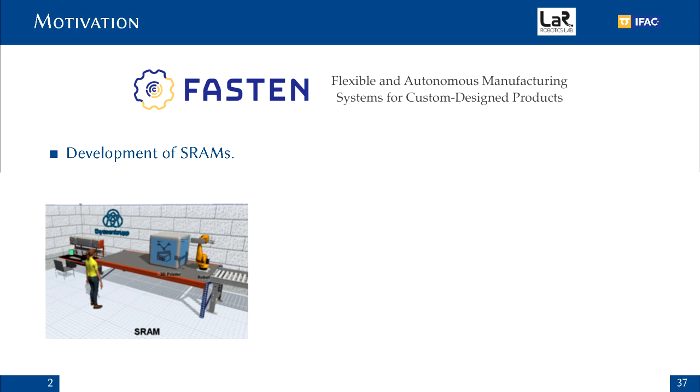This research is part of the development of Smart Robotic Additive Manufacturing Unit (SRAM), supported by FASTEN. This system is capable of recognizing and picking up parts without the need for human interaction.

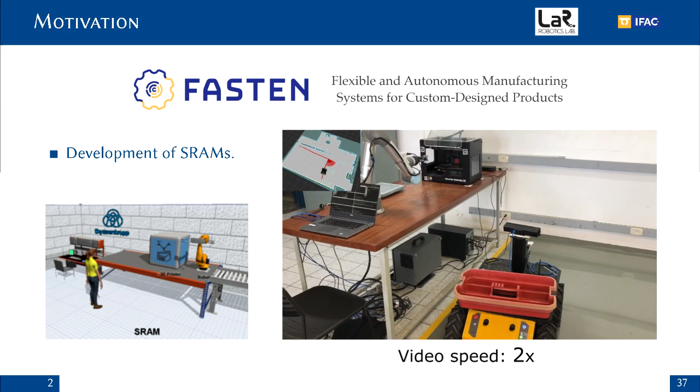As you can see in this video, an AGV robot moves autonomously to a position close to the manufacturing unit to collect a 3D printed part. A robot manipulator picks up the part on the print pad and moves it to the AGV robot. After that, the AGV robot moves back to the initial position.

This additive manufacturing unit must be safe enough for avoiding collisions with objects in the environment during the pick-and-place activities. As a solution to this, we proposed an improved path planning technique based on the artificial potential field algorithm.

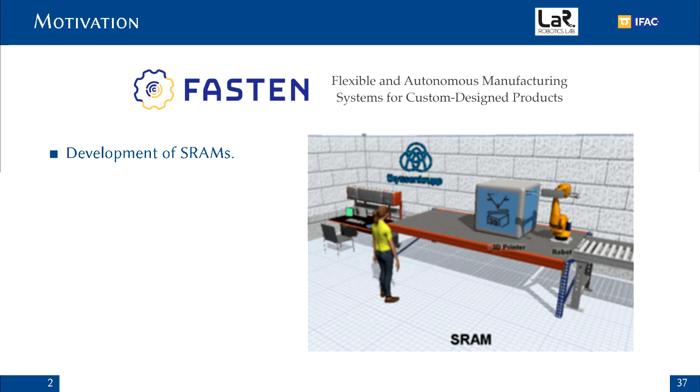This additive manufacturing unit is responsible for recognizing an object, estimating its pose, grasping it using a vision-based control, and moving it to an AGV robot.

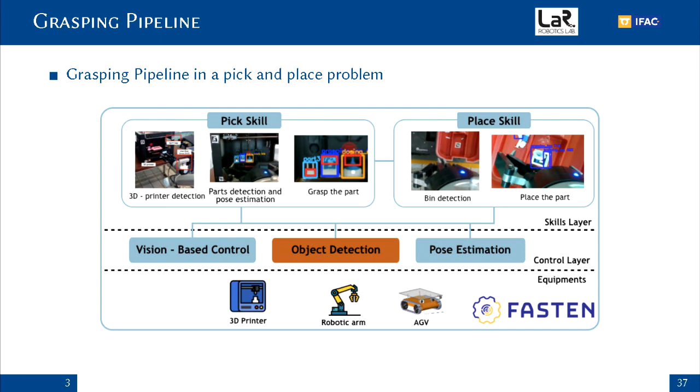This is achieved by means of the pick-and-place skill that employs an object recognition system based on convolutional neural networks. In order to acquire reliable images for the object recognition system, the robot moves to a pre-grasp position before the pick skill.

One of the goals of autonomous robotic systems is to perform safe movement control so there is no collision with obstacles such as people, machines, and objects. This objective requires the treatment of several problems such as perception, movement control, as well as trajectory and path planning.

The Artificial Potential Field, or APF, first proposed by Professor Dr. Oussama Khatib, is an example of a path planning algorithm that can be applied in real-time applications due to its local path planning and low computational cost.

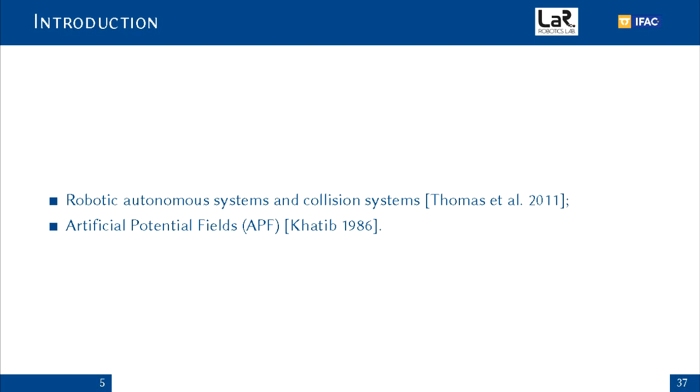The manipulator moves in a force field. The position to be reached is an attractive pole to the end effector, and the obstacles are repulsive surfaces to the parts of the manipulator.

This path planning algorithm considers the elements of the environment as electrical charges, in which the goal has the opposite polarity of the robot and the obstacles have the same polarity.

Therefore, we can generate potential fields that act like the electrostatic field, attracting the robot to the goal and repelling it from the obstacles. The generated potential fields reduce the path planning problem to an optimization problem. The potential field is the objective function and the goal represents its global minimum. The gradient descent algorithm is used as the optimization method.

In order to avoid some singularities throughout the planning, the attractive field must reduce as it approaches the goal. This is required to obtain a smooth movement through the path.

Be zero at origin: it's crucial to stabilize the movement after the robot reaches the goal. Have continuous derivatives at the origin: this behavior is necessary because if there is a discontinuity at the origin, an impulse could be generated and serious damage can happen to the robot.

Have constant derivatives for long distances from the goal. This prevents the force from increasing unbounded far from the goal and causing excessive acceleration.

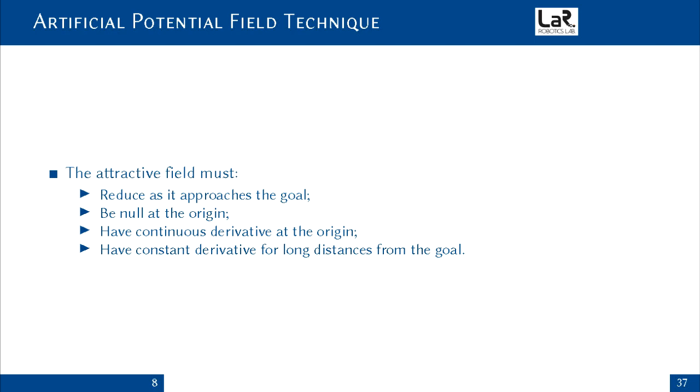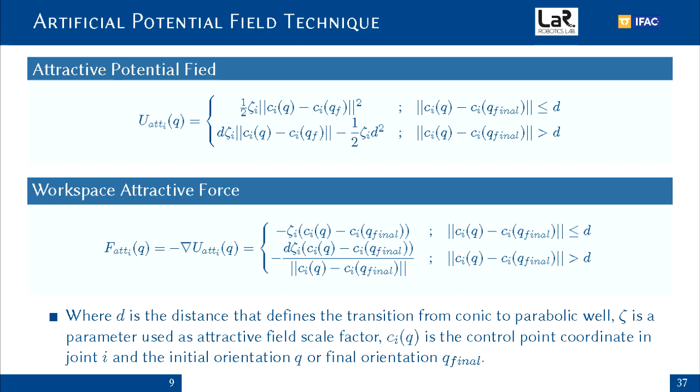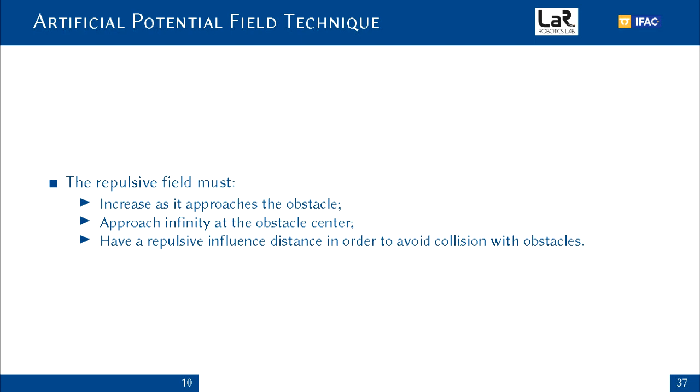The repulsive field must increase as it approaches the obstacle, approaching infinity at the obstacle center, and have a repulsive influence distance in order to avoid collisions with obstacles. Due to this repulsive influence distance, the robot starts to decrease its velocity before the collision with the obstacle.

Here we present two equations. The first one is the repulsive potential field continuous function by parts. This function represents a transition from a zero potential to a potential that increases with the inverse of the distance to the obstacle. Consider the parameter ρ0, which is the obstacle's influence distance.

The second equation shows the negative gradient of the repulsive potential field. Note that as the robot approaches the obstacle, the repulsive field increases to infinity at the obstacle center.

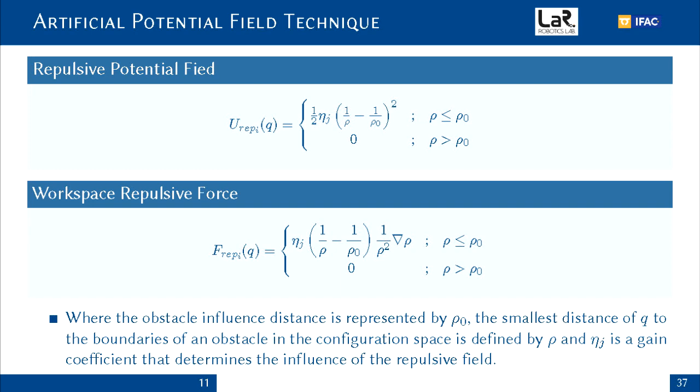Goals non-reachable with obstacles nearby, or GNRON, is the inability to reach the goal when it's within the obstacle's influence distance. The so-called modified artificial potential field, or MAPF method, solved the GNRON problem, but as the robot moves away from the target, the total repulsive field increases proportionally to the distance from this target, which is not desirable since it can prevent the robot from reaching its target.

Zhang, Liu, and Chang presented the adaptive artificial potential field method that is an enhanced version of the modified APF that solves the GNRON problem and prevents the increase in the repulsive field.

As opposed to the modified APF method, when a robot is far from the target, the repulsive field behaves similarly to the classic APF, therefore preventing the occurrence of local minimums. Close to the goal, the repulsive field behaves as the modified APF case, so the GNRON problem is avoided.

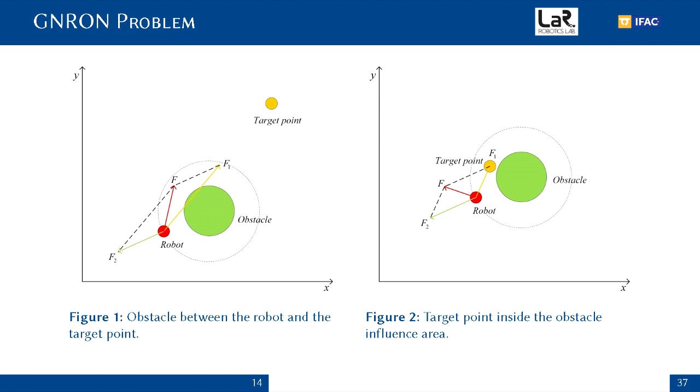In Figure 1, we show that the resulting force F acting on the robot avoids the obstacles and moves towards the goal. In Figure 2, the resulting force moves the robot away from the obstacles. As a result, it's not possible to approach the goal within the obstacle's repulsive influence area.

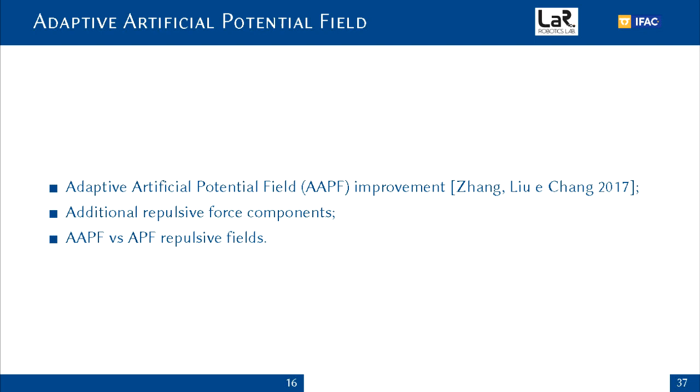The adaptive artificial potential field algorithm solves the GNRON problem by modifying the repulsive potential field. The workspace repulsive force has a component parallel to the attractive force, allowing the robot to approach the goal while avoiding the obstacle. It behaves in the same way as the classic APF when it's far from the goal.

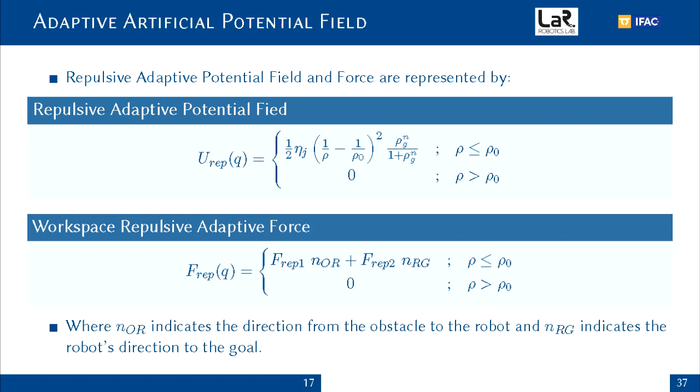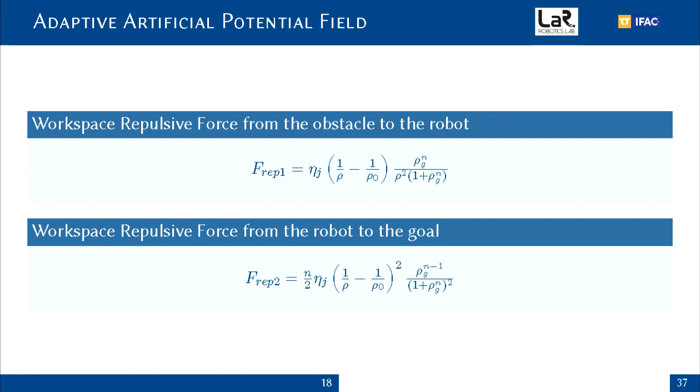The frep1 component, represented by the first equation, repels the robot from the obstacle, and the frep2 attracts the robot to the goal. Note in this image that the frep1 component moves the robot away from the obstacle, and the frep2 drives the robot to the goal.

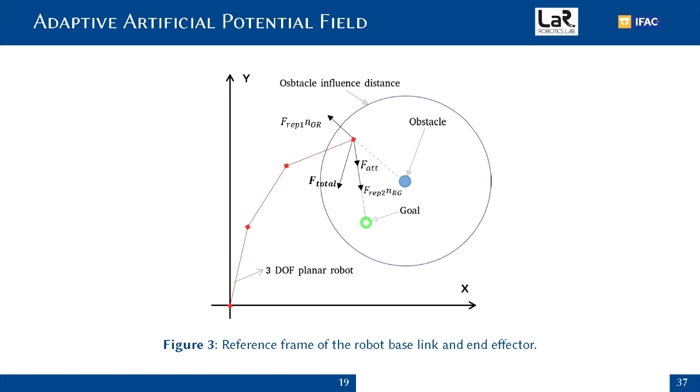The total force acting on the end effector will guide the robot to the target. The adaptive artificial potential field method allows the control point on the robot to smoothly enter the obstacle's influence distance. Therefore, we apply the classic APF method on the other joints except for the end effector, so there's no risk that the other control points will enter the obstacle's influence distance.

Orientation control is really important in path planning. The end effector is sometimes required to be in a specific orientation in order to pass in narrow passages or pick an object in a required orientation without colliding with the surrounds.

The adaptive APF method itself does not provide orientation control. That is, it's not possible to reach an orientation goal using only the adaptive APF method.

In this figure, the robot tries to pick an object located on the print bed. Since the AAPF method does not provide any solution to control the end effector orientation, it's not possible to pick the object on the 3D printer. In this case, the end effector orientation is naturally changing over time as a consequence of position control.

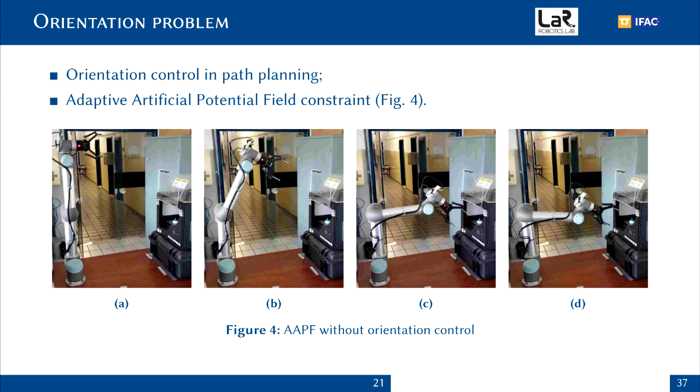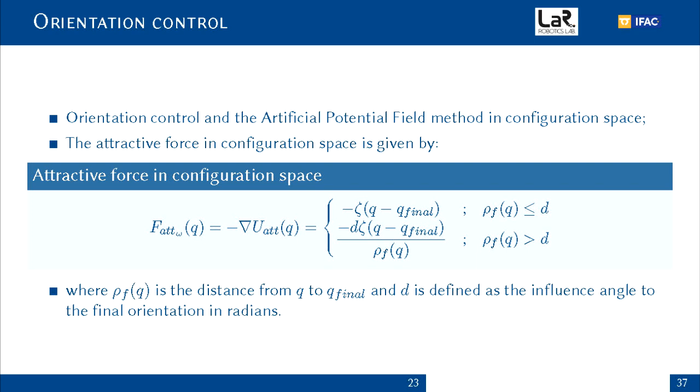The APF method was also implemented in configuration space in order to control the orientation of the end effector through the path. The attractive force is set to the negative gradient of the classic APF method in configuration space. Therefore, we do not consider the Euclidean distance to the target, but the Euler angles instead.

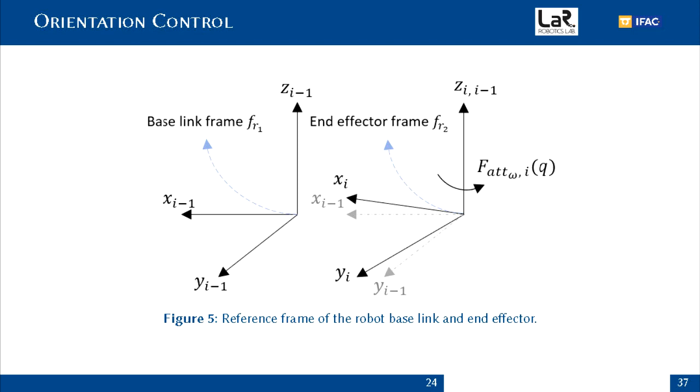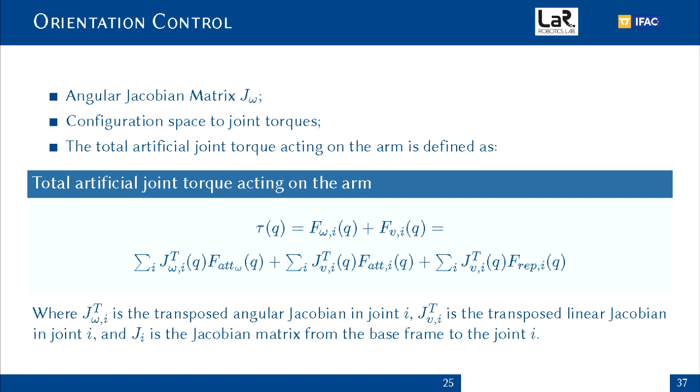For this method to work correctly, a static frame should be set as a goal. It could be the base link as shown in the image or any other frame created for this purpose. To implement the end effector orientation control, only the angular part of the Jacobian matrix is considered. We transform the attractive force of the orientation from workspace to configuration space through the transpose of the angular Jacobian.

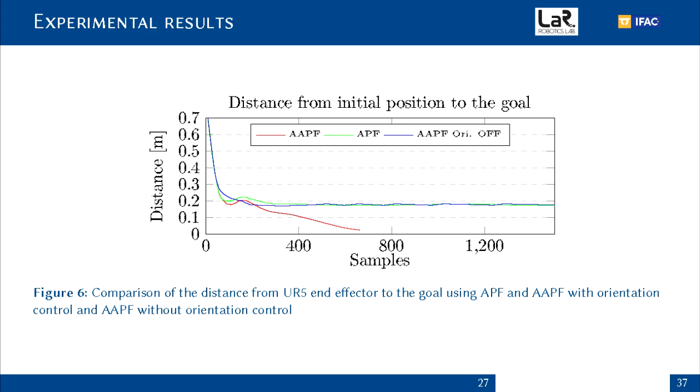The proposed adaptive APF method with orientation control is the only method that converges to the goal compared to the classic APF method and the adaptive APF method without orientation control. In this experiment, we use the adaptive APF method with orientation control.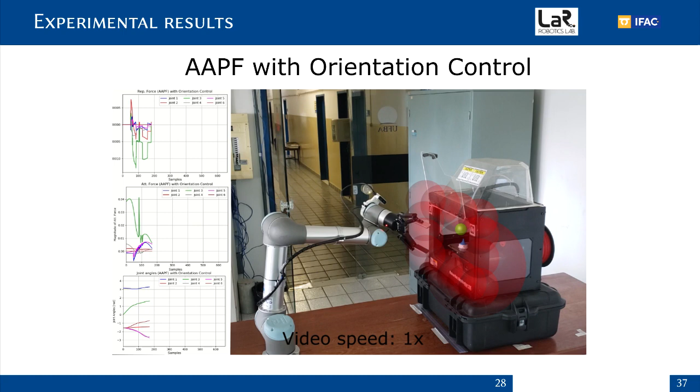The graphs show the magnitude of the attractive force, repulsive force, and the joint angles over the path. The video shows that the orientation is smoothly changing to achieve the target orientation. The path remains smooth even when the end effector enters the repulsive fields, proving the efficiency in solving GNRON problems.

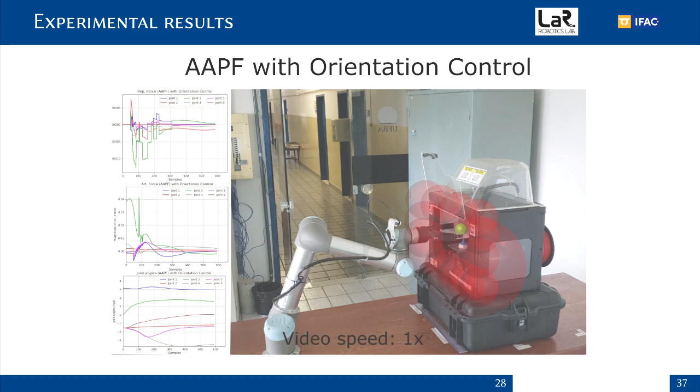In order to compare the results, we use the APF classic method with orientation control in this experiment. Note that the orientation changes over the path, but the robot does not reach the goal since the APF method does not solve GNRON problems. Furthermore, there are excessive oscillations around the repulsive fields.

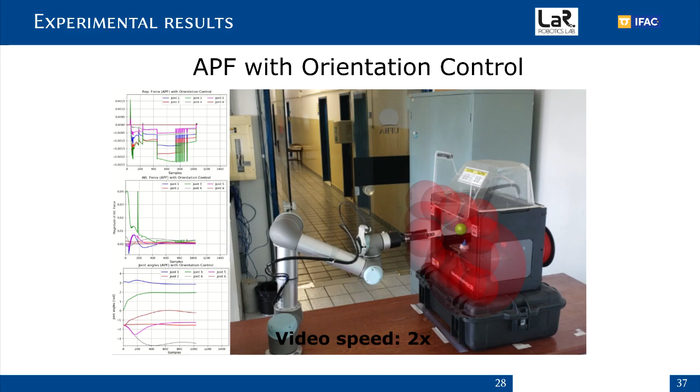In this experiment, we use the adaptive APF method without orientation control. Note that the end effector orientation is only changing over the path as a result of the position control. In addition, when the end effector enters the repulsive field, it oscillates while trying to reach the goal.

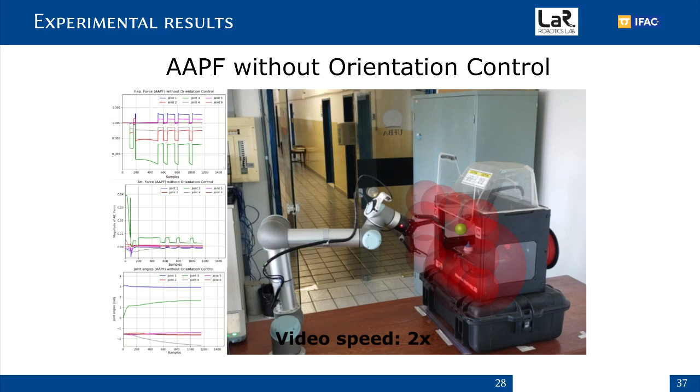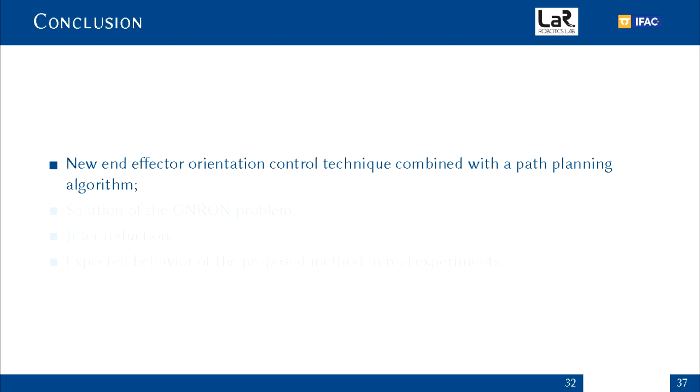In this research, we introduced a new end effector orientation control technique based on the adaptive artificial potential field, which allows the end effector to reach the desired orientation. The local minimum, known as goals non-reachable with obstacles nearby, was also avoided employing the proposed method.

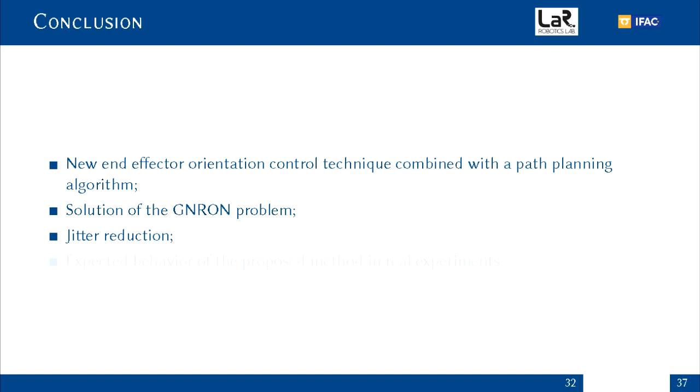It was shown that the adaptive APF method reduces the oscillations in narrow areas and allows the end effector to reach the goal even if it's inside the obstacle influence area. Experimental results show that the proposed method performs in practice as expected by the theory.

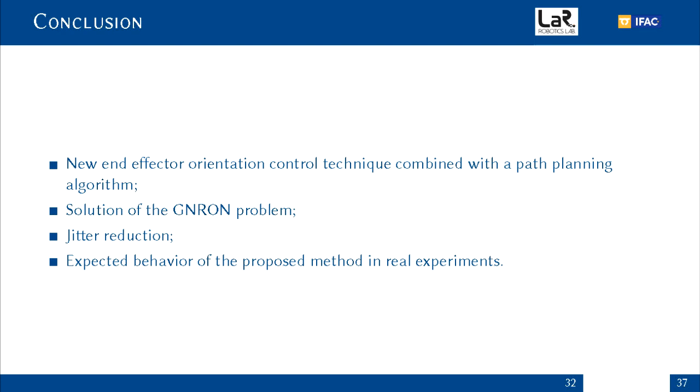Despite the results, the manipulator does not always reach the goal due to the static weights of the attractive and repulsive forces. Therefore, it's necessary to constantly adjust them in order to achieve a balance between the potential fields.

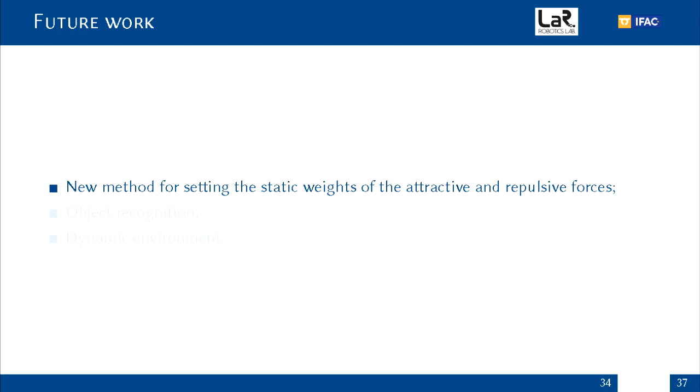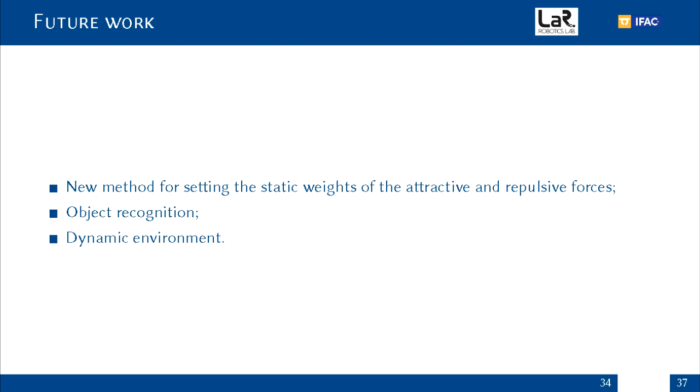In future works, a method for environment exploration with dynamic targets and obstacles will be applied. An object recognition system will also be implemented in order to relate each obstacle field to the objects in the environment.